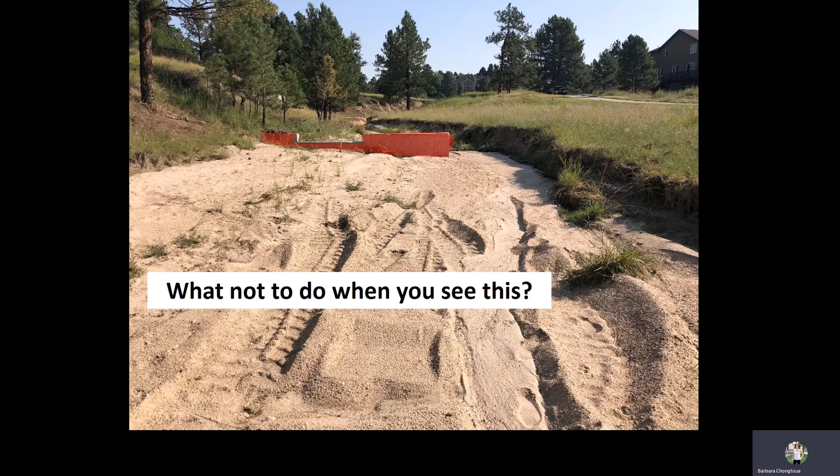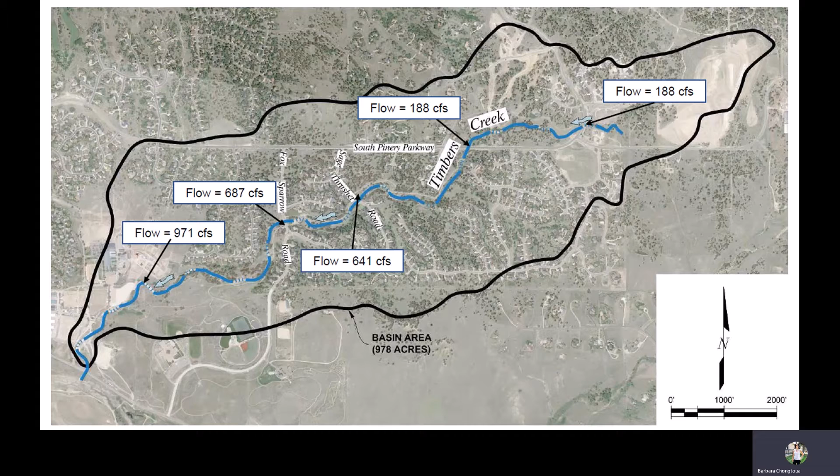Douglas County came to us when they started to experience erosion on Timbers Creek, a project located in Douglas County, a fairly small watershed, a tributary to Cherry Creek. Historically an ephemeral system, but development started in the 90s, and within just a few short years, development was nearly built out. But the development did right. It preserved a decent stream network and wide stream corridors, and check structures were introduced to stabilize Timbers Creek. Everyone tried to do right.

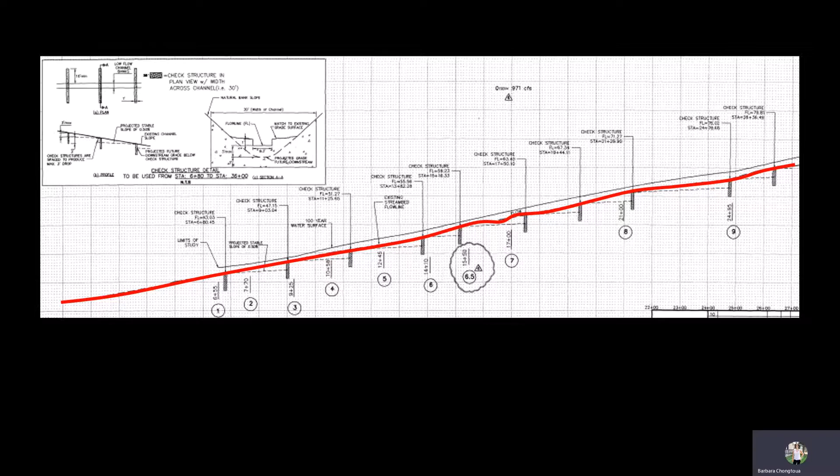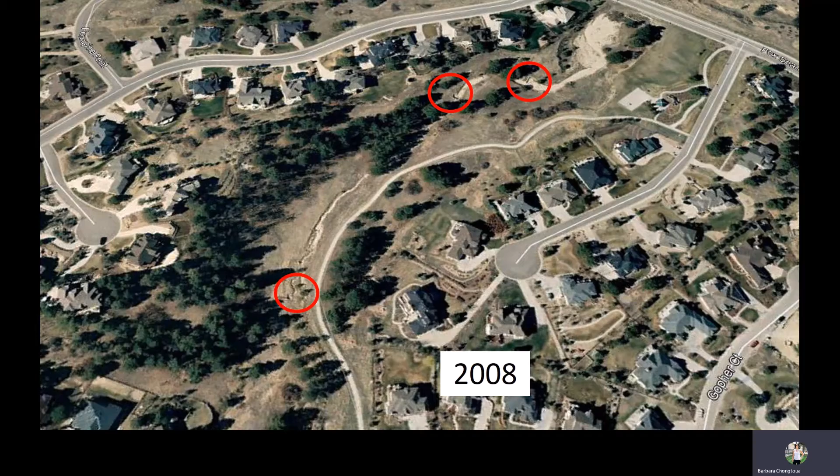But Timbers Creek is deceivingly quiet until it storms, and then it wakes up, as you can see here through homeowner videos. And this is the problem reach. Between 2002, 2004, and 2008, the check structures that were installed had been flanked. And you can see here, noticeably, that an active channel was developing. The county and homeowners were very concerned with the loss to property, infrastructure, the trails, and the mature vegetation. And so we moved into action.

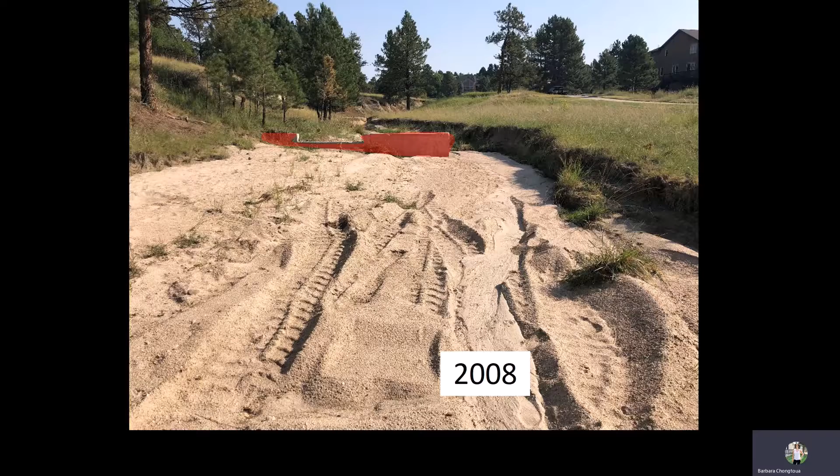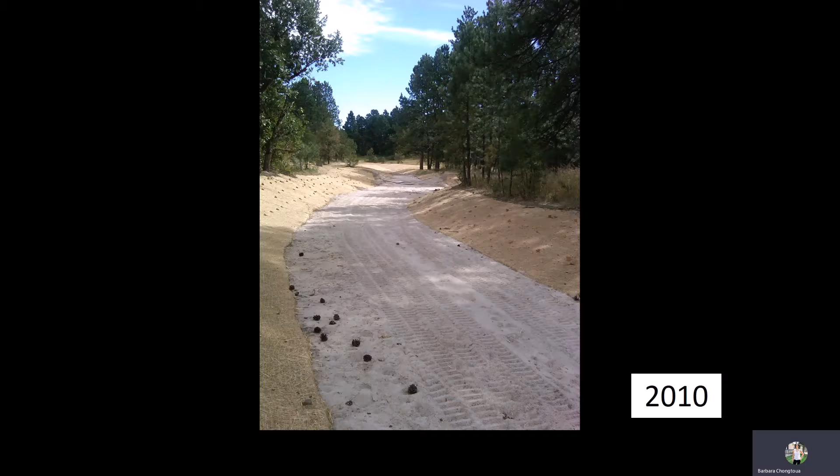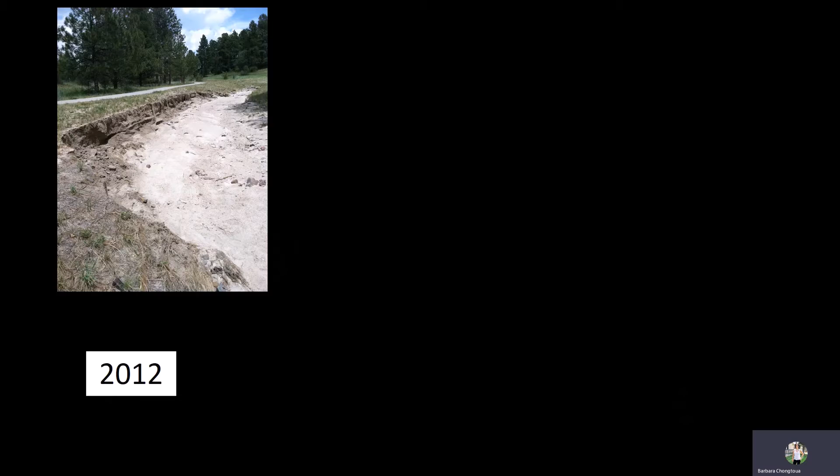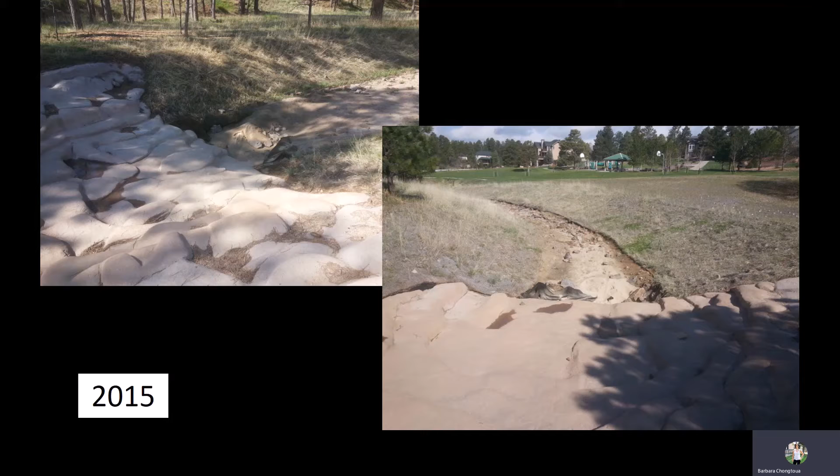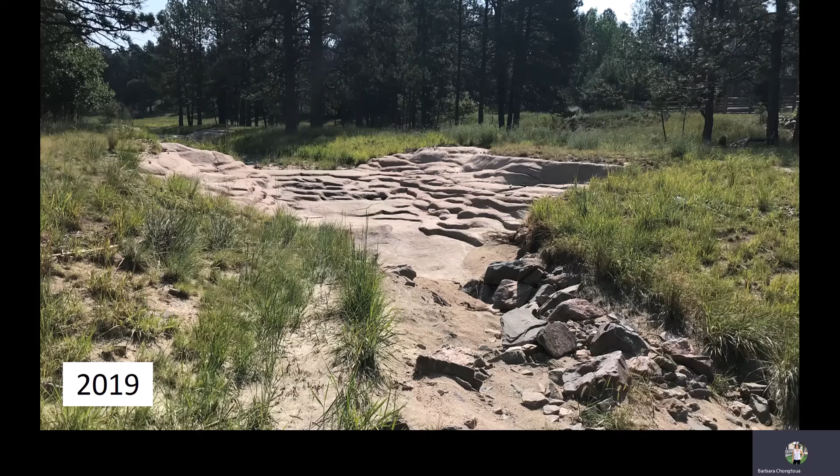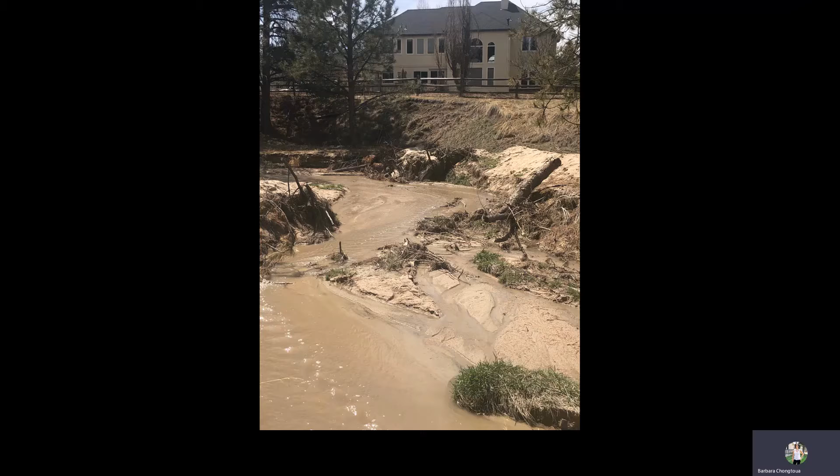And yet within a few short years, we experienced similar problems. We are still monitoring this repair project, and at some point, I would imagine that maybe a repair to the repair of the original repair project might be necessary. In 2017, the county and the homeowners reached out to us again, this time concerned about a reach that was upstream of the project I just shared. This reach was experiencing degradation, channel migration that was threatening properties and homes, and trails because of severe bank erosion.

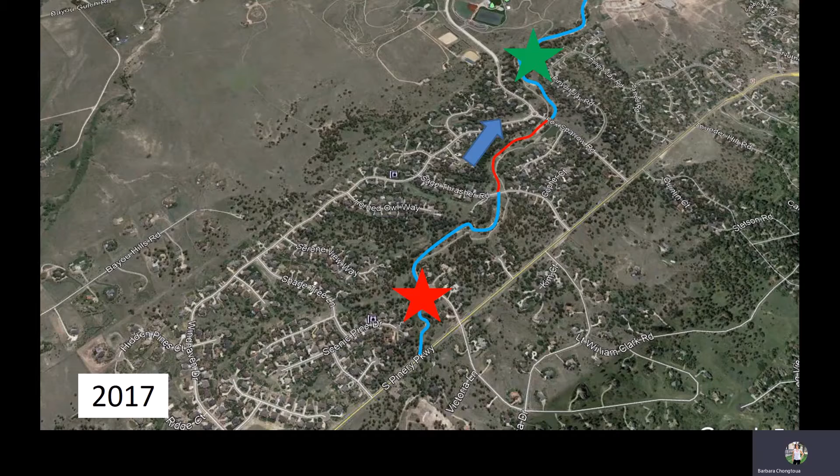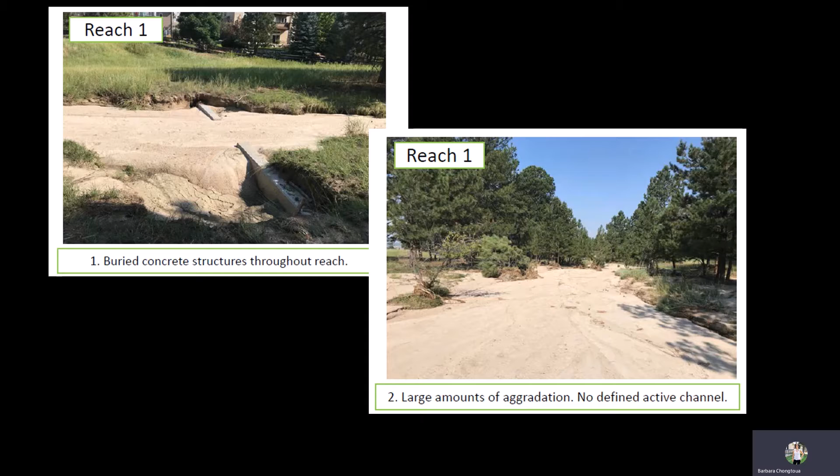There's another reach that they brought to our attention downstream of the reach that I discussed earlier. Although beautiful, there were also concerns with trees, with property, with infrastructure. But this time, not because of degradation, but because of severe deposition. We didn't jump directly to a fix this time. We spent the time to understand the system. I wanted to share with you a couple of lessons learned from this project. Number one, thank you.

We now know that a stable urban stream system must be founded on the following 5 pillars of hydrology, hydraulics, geomorphology, vegetation, and people. Timbers Creek is steep, sandy, and flashy. As such, it is very important that we understand the trajectory of these 5 pillars at a system scale to ensure our solution will not just mask the problem at a project scale.

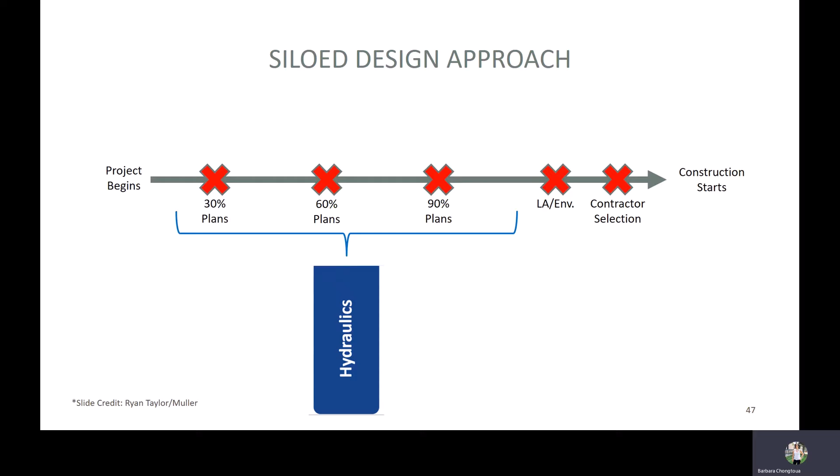Number 2, thank you again. Avoid a siloed design approach, which I employed with the first project. I imagined a solution, hired a team to implement my solution through a very linear design process that focused on just hydraulics. Instead, engage a multidisciplinary team and create a project atmosphere for collaboration. By employing a system approach through a multidisciplinary team, we were able to understand the problems and opportunities and spend our limited dollars more effectively. Mark, can you walk us through this?

Thanks, Barb. The first pillar that Barb mentioned was the hydrology, and as Barb showed, the watershed is nearly built out, and so the hydrology is mature, and the stream has had time to adjust to the changes in hydrology, so that's a set pillar. Then the next couple pillars are the hydraulics and geomorphology, and Muller and Stillwater worked together to start to understand the trend of hydraulics in the geomorphic process, which I'll talk more about.

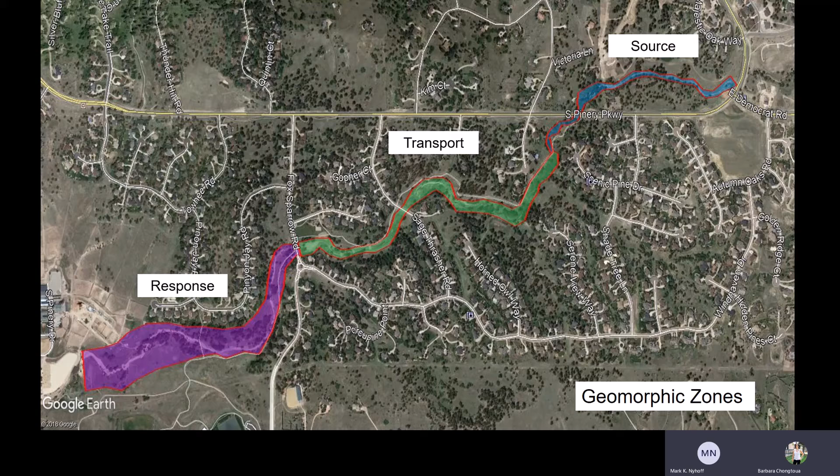When looking at a macro level, Stillwater Sciences, who helped us with the geomorphic assessment, identified 3 geomorphic zones for the entire 2-mile reach of Timbers Creek, with the source at the top of the reach, transport through the middle, and then the response at the bottom. A stream evolution model was then developed for the types of streams that we saw present along Timbers Creek.

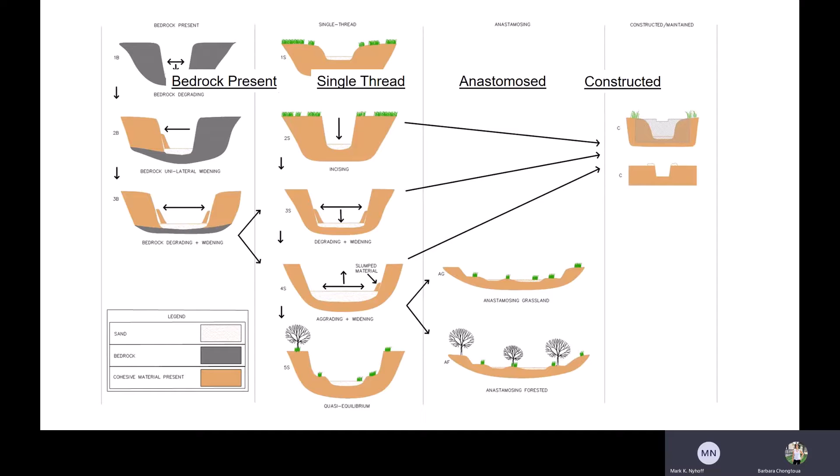The entire length of Timbers Creek was broken up into segments, and then each segment was matched with a stage of the stream evolution model, and then mapped spatially, as you can see with the different colors.

And even though there is generally source, transport, and response when you're looking at a macro scale, when you actually zoom in to a micro level, there are source, transport, and response areas present within each of the larger reaches. So even within the upstream reach, which is generally a source reach, there are areas of transport and response. And this is primarily due to the impact of development with road crossings, trails, trail crossings, and then utility crossings.

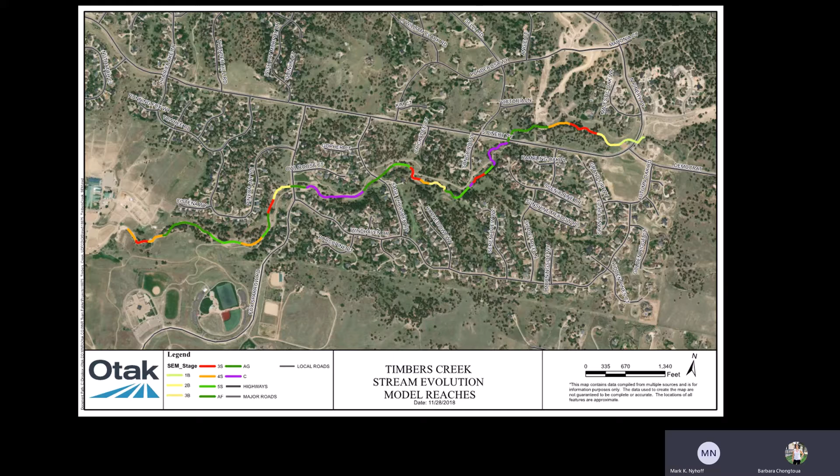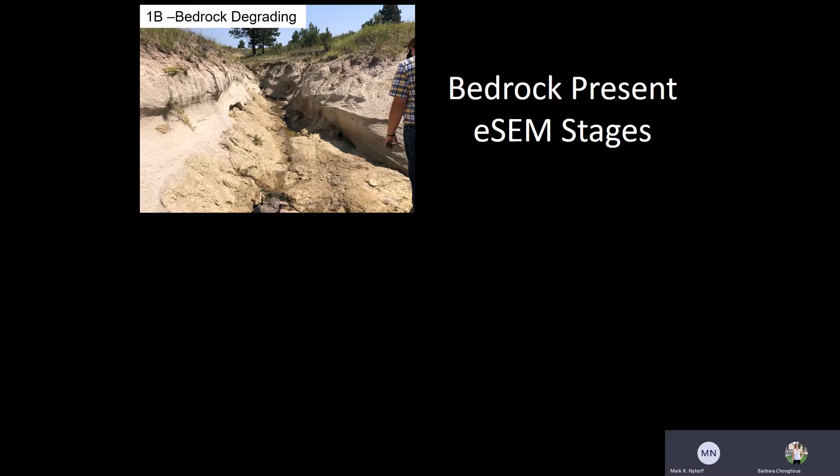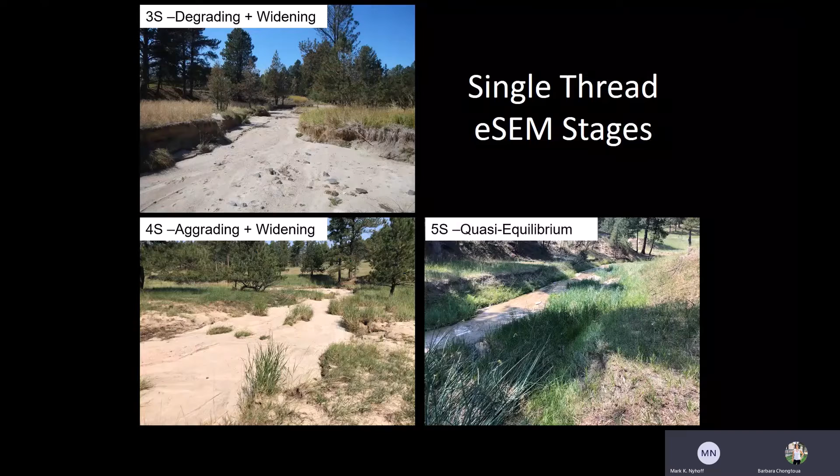Within Timbers, there are different types of channels present, which are at different stages of the stream evolution model. Some showing bedrock and widening and degrading. And then there are some single thread stages that are degrading or aggrading, and some that are within equilibrium. And then finally, there are some multi-thread stages.

This is our reality, living in the red at Timbers Creek. We have a very flashy system that is mainly a sand bed system. And I just want to add, Mark, that this is actually our reality, working along the Front Range and the plains. We have a very flashy hydrology, which is your axis at the top. And we're in a lot of sand or gravel systems, the axis vertically. And so Timbers Creek falls in this vein, but many of our projects also fall in this vein.

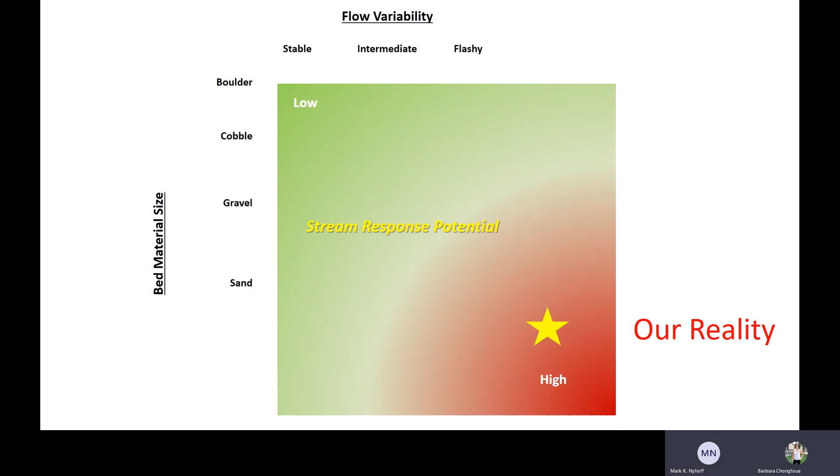And so we're kidding ourselves if we decide that we can just start problem solving like I did without really understanding the geomorphic landscape. We're at a disadvantage if we don't start there. Sorry, Mark, just wanted to add that little thought. Oh, great point.

The sediment transport modeling really highlighted the impacts of crossings on the sediment balance. In our case, the sediment transport has artificially created a response geomorphic zone with aggradational tendencies on the upstream side of crossings and then degradation tendencies on the downstream. And like we talked about, the upstream is a source reach, but there are still these different zones within that reach, again, mainly due to human development.

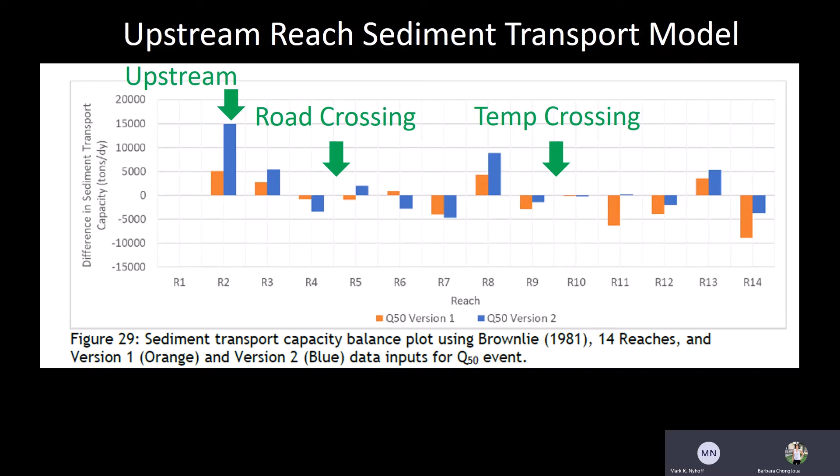Yeah, I just wanted to add, Mark, before I didn't give much thought to where I put, say, pedestrian crossings or utility crossings, but understand that those man-made elements can really disrupt the geomorphic landscape of how sediment moves through the system. So this really helped me to better understand how sometimes our actions can interrupt the sediment exchange along creeks like Timbers. Absolutely.

And the next pillar, vegetation community. So we brought on DHM to the team to evaluate the ecology along Timbers Creek, which is another really crucial pillar to stable stream networks. So DHM evaluated the 2-mile stretch and picked out 7 different ecological zones along Timbers Creek, and the zones really vary greatly from downstream to upstream. But you can see with the different colors represented how much variation there is.

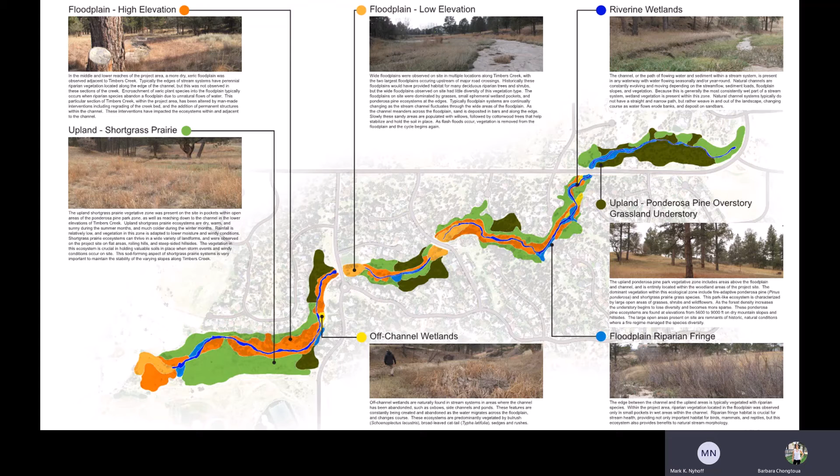They also broke the creek into 15 different segments and then identified potential improvements that could be implemented within each of those reaches. So when we got the team together, we sent out DHM to perform the ecological assessment and Stillwater to perform the geomorphic study, and they both identified almost identical segments of the channel, which is interesting, not totally surprising, but it really just shows how linked the ecology and geomorphology of the creek are. And in most cases where the vegetation is really struggling and is not diverse, the channel is also struggling.

DHM also inventoried all of the existing vegetation along the creek from top to bottom, and then they noted what vegetation was really successful in each of the different environments. And this is just really invaluable when developing planting plans and seed mixes. So we are not just using the standard seed mixes from the local municipalities, and not to say these standards are bad, but they can't be applied in every situation and should be evaluated on each job to pay attention to what species should be installed with the project to give it the best opportunity for success in its environment.

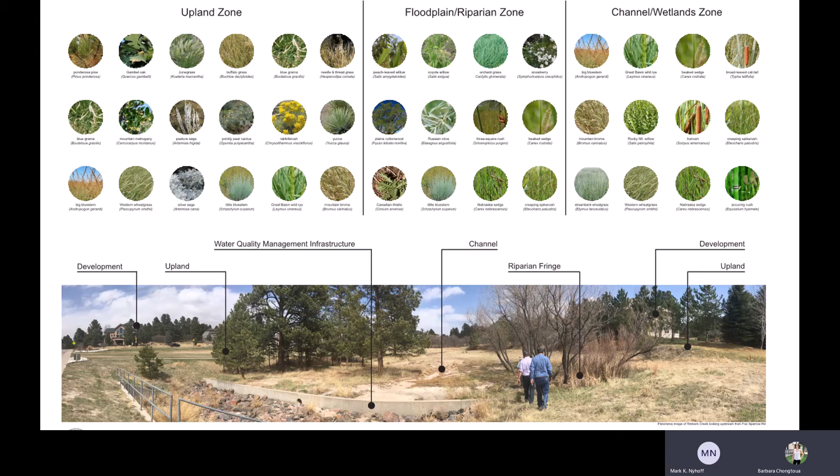And then the final pillar is the human connection. So in the past, we've piped stormwater, we've put it in concrete channels, just trying to move water as efficiently as possible. And now we're really trying to move towards understanding how stable streams and healthy vegetation can enhance the human experience. As people, we want to enjoy and spend time near our streams. And in this case, there's a trail running all along Timbers Creek from top to bottom. So it's really important to the community.

And just to make a point, Mark, the reason this project became a project and was a priority for the county and the Metro District, I wish we could say that it was because of geomorphology or hydraulics, but it was because of the connection with people. There was a safety hazard that was now present. The trails were no longer safely usable by the homeowners, and this area was no longer serving as an amenity to the community. And so because of the human connection piece, it's actually the pillar that prioritized this as a project. So it's a very important pillar that we often kind of prioritize last.

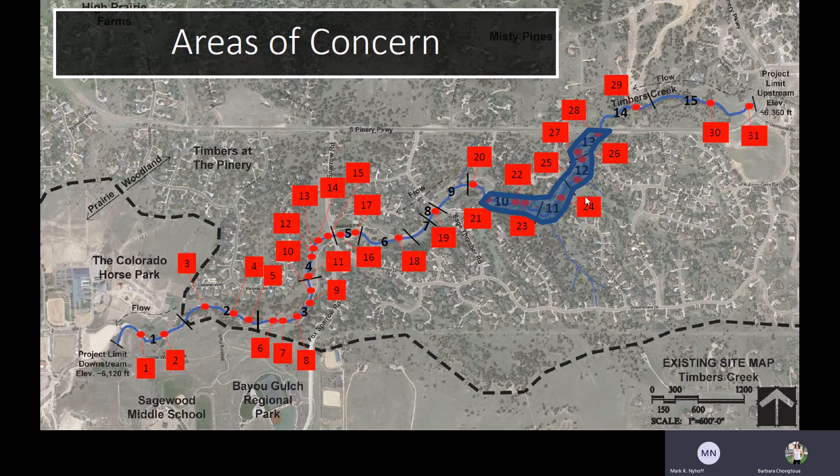So the existing channel had multiple head cuts moving upstream, bank erosion, several sanitary sewer crossings that we mentioned previously that were at risk, trails, and so something needed to be done to step in and address those issues.

So like Barb mentioned, in the past, we tried the harder approaches such as concrete, sculpted concrete drop structures, riprap to fix Timbers Creek, and we've really had varied success with that. These approaches are all tried and true methods that we have in our engineering toolboxes, and they've worked successfully all over the Front Range, but not necessarily at Timbers Creek. So we had to think a little differently, and this time as a team we tried to balance all the pillars with a softer approach.

The geomorphic assessment identified some of the areas that could be left alone, and over time the channel would evolve and widen to eventually achieve stability. So we tried to widen, flatten, and really reconnect the floodplain where possible, while still protecting trees, infrastructure, and trails. So essentially trying to speed up the evolution model to provide stability right now. And the ecological assessment showed the necessity for healthy vegetation. So we developed an approach where the vegetation would do most of the heavy lifting to provide stability and create a living and resilient creek that over time would allow the channel to move and adjust as it needed without completely unraveling and putting people and property at risk.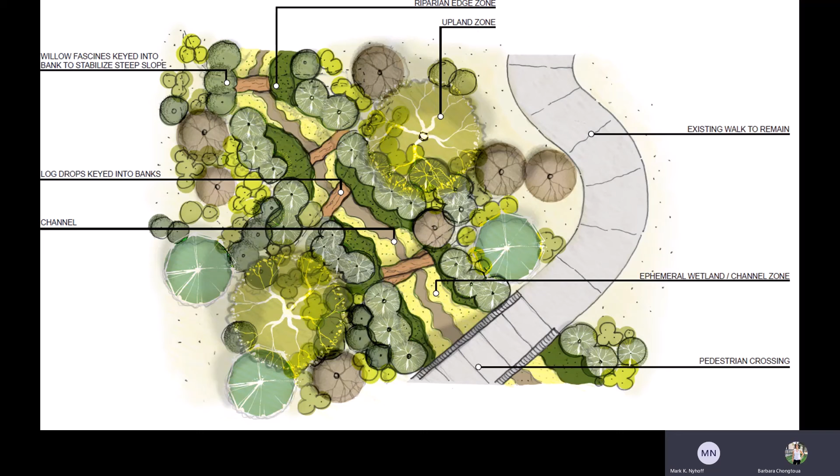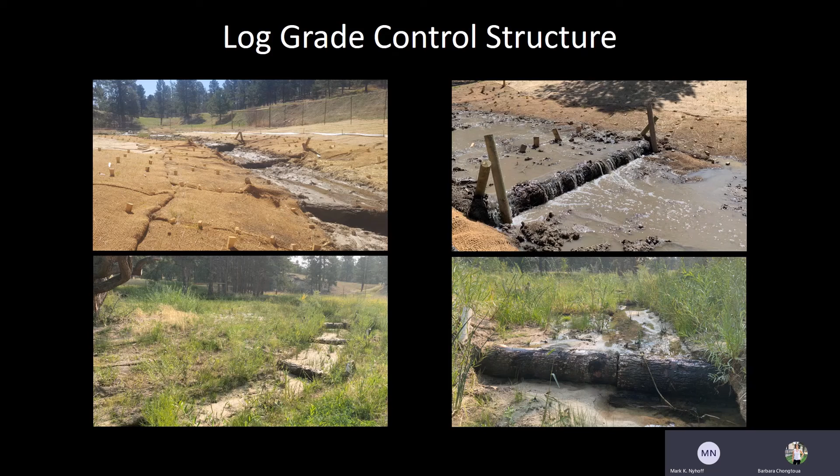We knew the channel slope still needed to be flattened with grade control structures, so we decided to implement a variety of approaches, and I'll just touch on one. We used low height log grade control structures, and these logs will slowly degrade over time, but they'll hopefully maintain stability while the channel and vegetation adapt. And we also knew water was going to be crucial for the success of the softer approach, so we installed clay cutoff walls at each of the grade control structures to bring the water to the surface to provide passive irrigation for the vegetation we installed. Getting the water to those plants was needed to help them survive and create that stability.

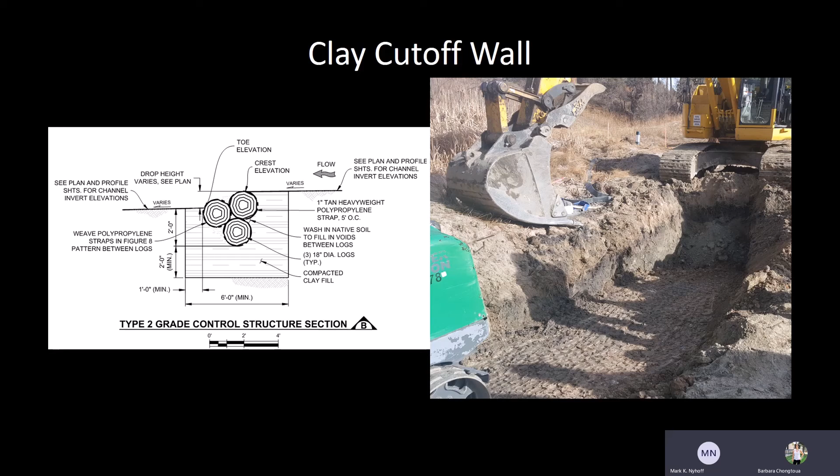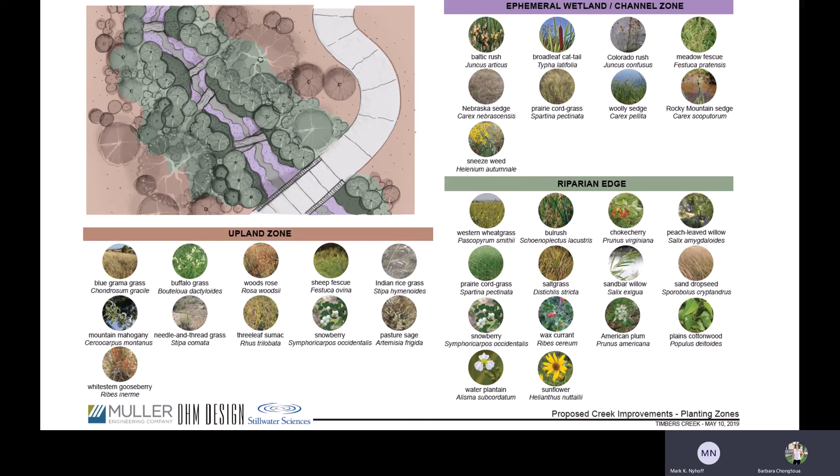And since the vegetation was key to the success of the softer approach, it was important that the proper species were installed, using what we had studied earlier at Timbers Creek to place the right vegetation in the right locations to provide stability and really increase roughness along the channel and overbanks. So this is what we envisioned at the start, a softer and really a messier approach that will hopefully allow the channel to move and adjust while providing stability.

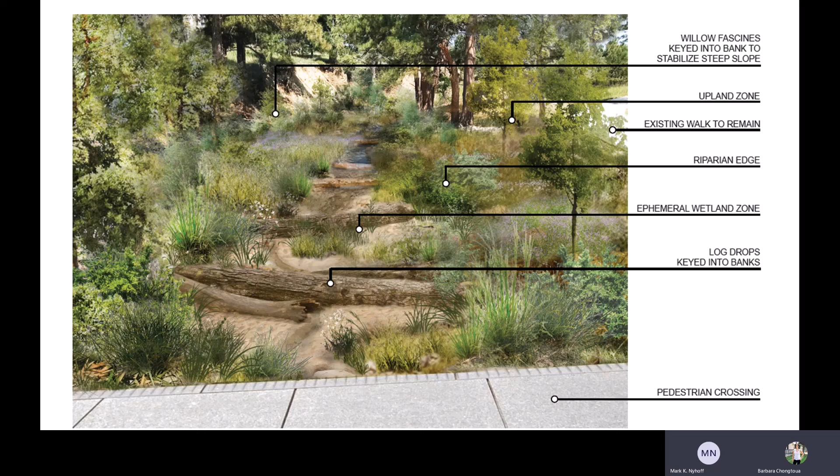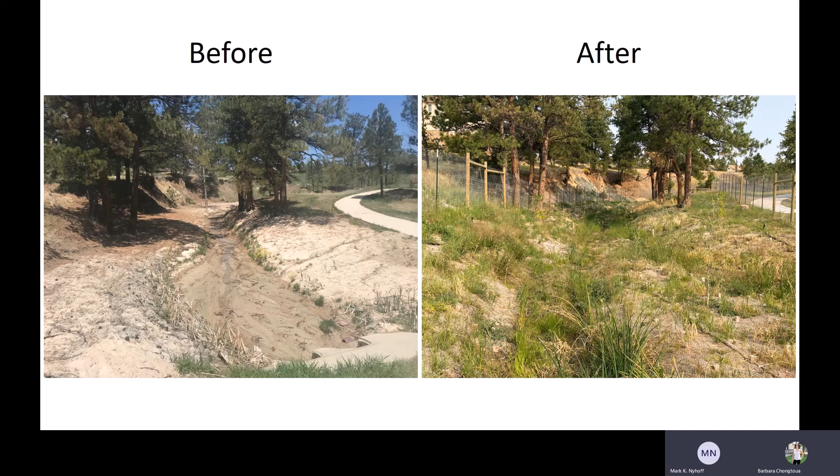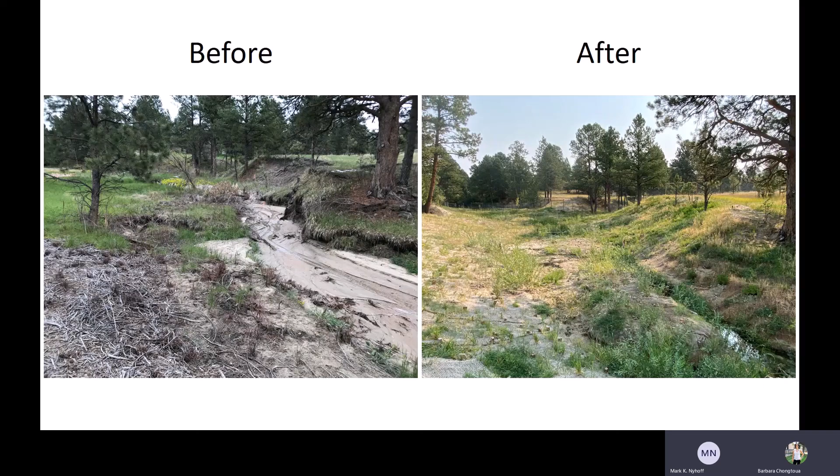And this is that same shot now, before and after. And looking downstream, another shot before and after. So Nyhoff Civil was the contractor, and they wrapped up construction earlier this year with plantings going in late spring, early summer, and we've been happy with the growth we're seeing out there and optimistic. And the clay cutoff walls have been successful at bringing water to the surface.